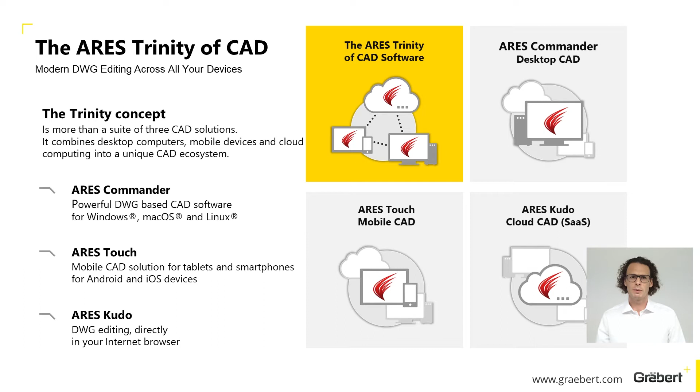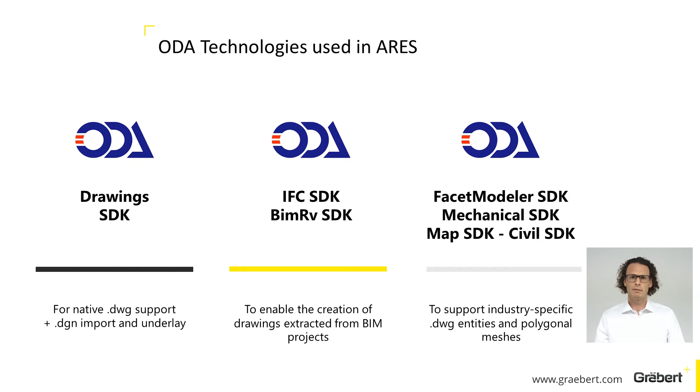What sets the ARES CAD software apart is our Trinity concept. ARES offers the same core CAD features to create and modify DWG files on Windows, Mac, and Linux, but also on mobile and cloud. Underneath each of the ARES solutions, we leverage many SDKs from the ODA. The most important is the Drawings SDK, which we use for native DWG support. We also use several industry-specific SDKs such as the IFC and BimRv or the Mechanical and Civil/Map SDKs.

Another way to look at ARES is to see it as a development platform that is extending the ODA toolkits with a full set of 2D and 3D CAD features that help developers with a faster go-to-market. And this both with APIs that are ODA-based or APIs that offer an easy migration from AutoCAD or other similar CAD systems. You can therefore rely on our platform for the CAD features and focus your development on the capabilities that make your solutions unique in the market. I will now show a couple of examples from different industries on how partners leverage ARES.

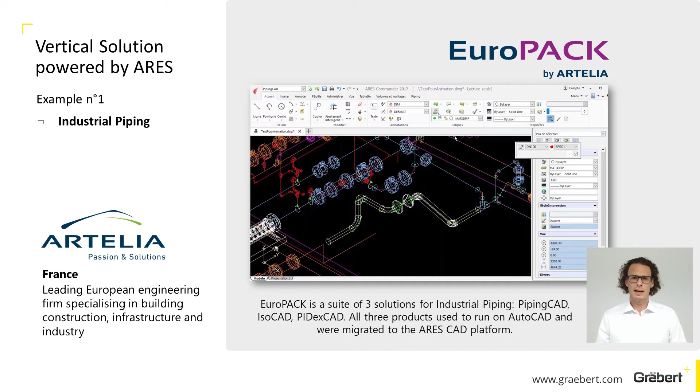As a first example, this is a French partner that is specializing in industrial piping. They have 3 solutions that used to run as plugins for AutoCAD. Now they're based on ARES, and their customers no longer need to purchase AutoCAD. Besides, Artelia is now able to sell the full package under their own brand Europack. For the AEC segment, I would like to take the example of SiteMaster Kitchen, that's developed for the Graebert surveying department. What's most interesting here is that the application is used in the field. With our Trinity SDK, we can use the same technology for Windows and mobile devices running iOS and Android.

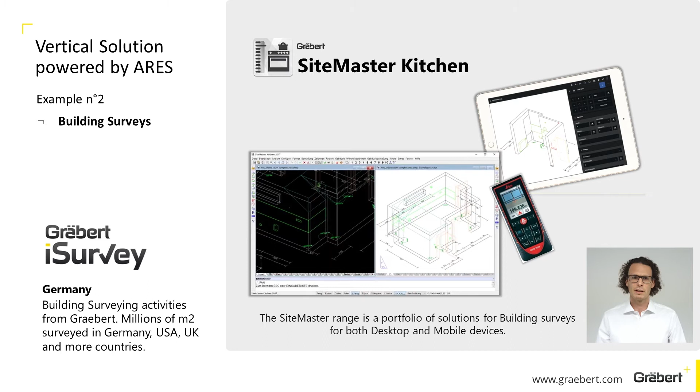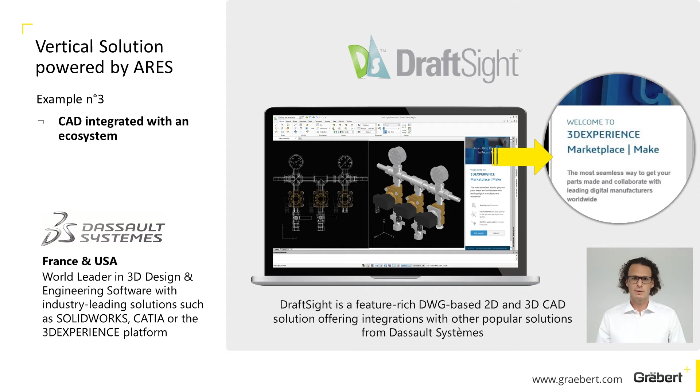In the mechanical field, I would like to take the example of DraftSight. It's been a huge success with millions of users from all over the world. These users are generating a lot of feedback, and we are focused on contributing back the resulting improvements to the ODA. Another interesting aspect is to see how Dassault Systèmes integrates the DWG editing features powered by ARES within their ecosystem. As an example, you can see here the integration with the 3DEXPERIENCE Marketplace that the DraftSight user can use to look for manufacturers for their design. And most recently, Dassault Systèmes released the integration with the 3DEXPERIENCE cloud-based collaboration platform, which is now becoming the backbone for all products from Dassault Systèmes.

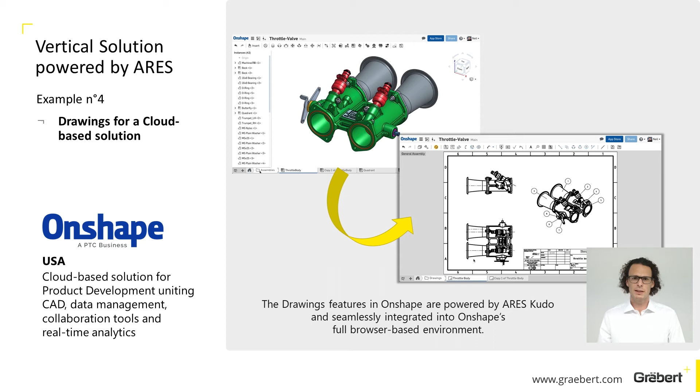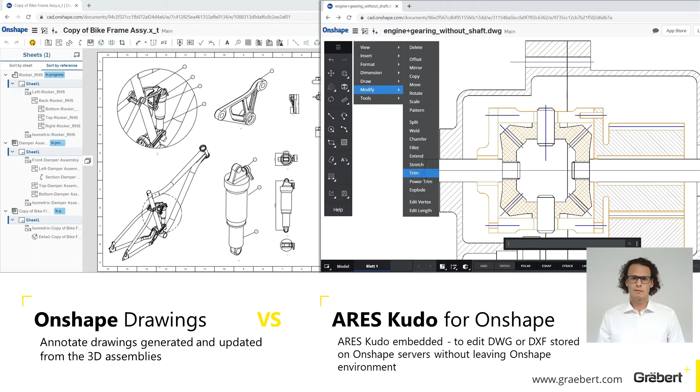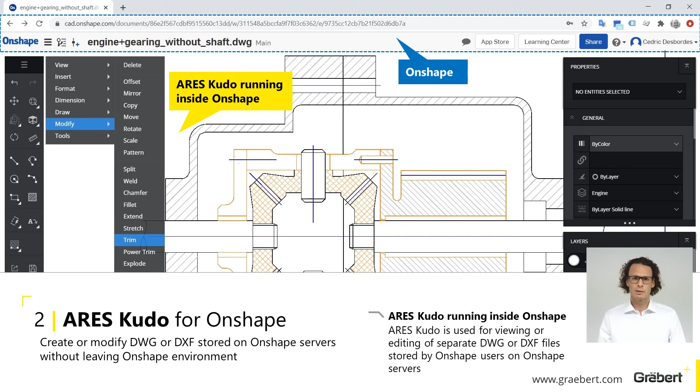Finally, I want to show you an example of cloud in production. Onshape, now a PTC business, was started with the idea of bringing mechanical CAD to the cloud. Onshape teamed up with Graebert to develop a unique drawing solution for the Onshape users. Onshape Drawings illustrates how ARES Kudo is a full-blown CAD platform for 2D DWG editing in the cloud. Inside Onshape, the integration between the Onshape solid modeling environment and the drawing environment based on ARES Kudo is seamless. It is an example of how cloud enables newer and deeper integration models.

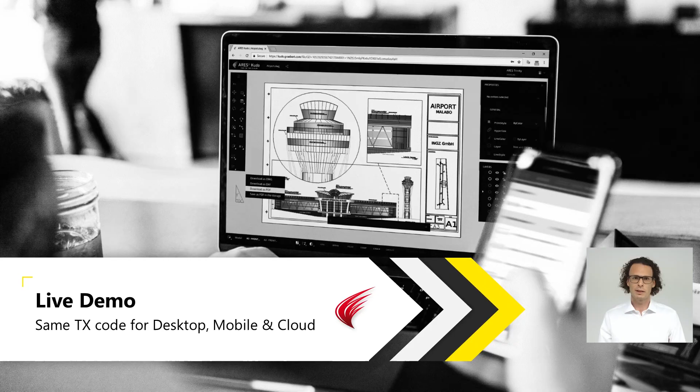Before I wrap up, I'll give you a demonstration of how quickly developers can leverage their investment in TX code to reach cloud and mobile users. We live in a world with more and more users that are mobile first or use only web devices. These users also want to interact with CAD data. At the same time, developers want to meet customers where they are and generate better returns on investment by addressing more devices and screens. In our demo scenario, we want to provide users with interactive model checking logic on their device. We will address this need by first developing a checking function with the ODA MFC app, and then migrate it to ARES Commander, add some interactive elements, and then port it to mobile and cloud. In the interest of time, I will only share with you the results, but please contact me if you want to see the underlying code.

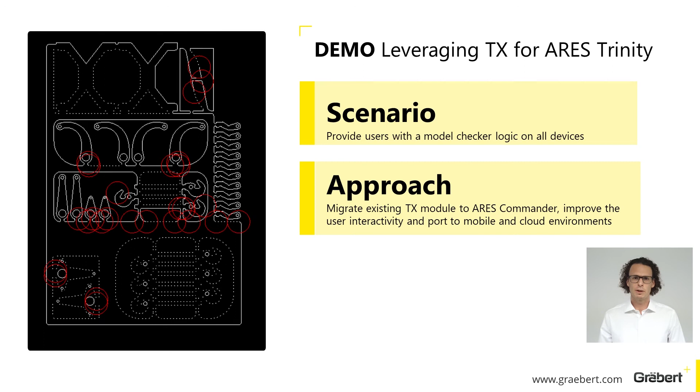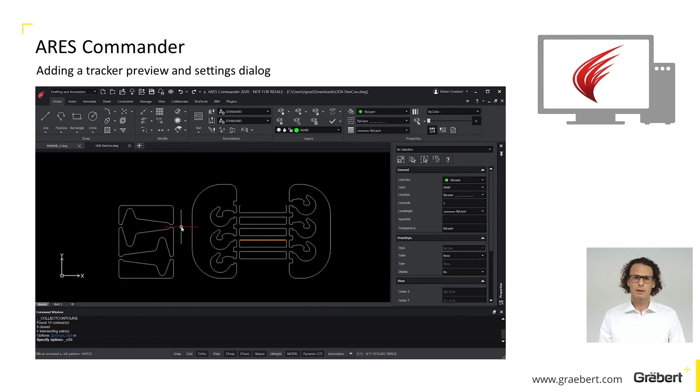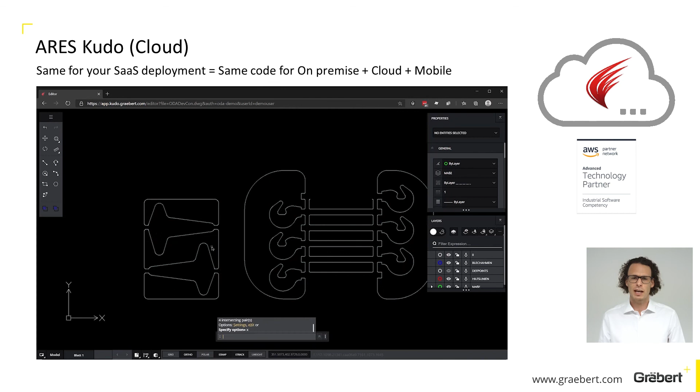First, we create a TX module that scans the geometry stored in a DWG file for closed loops and intersections and presents the results in the output window at the bottom. Now we take the original code and add 2 extensions, a configuration dialog and 2 preview trackers that show the results interactively. These additions are implemented with the ARES Trinity extensions to TX. As the ARES Trinity SDK is supported on all platforms, we can run the same extension on iOS with no changes. The same is true for the browser. Here ARES Kudo, deployed on-premise or from our SaaS offering, runs the same extension with no changes.

In conclusion, we can support you in your migration from other CAD software with our compatible APIs or help you in bringing your investment in TX to cloud and mobile devices.